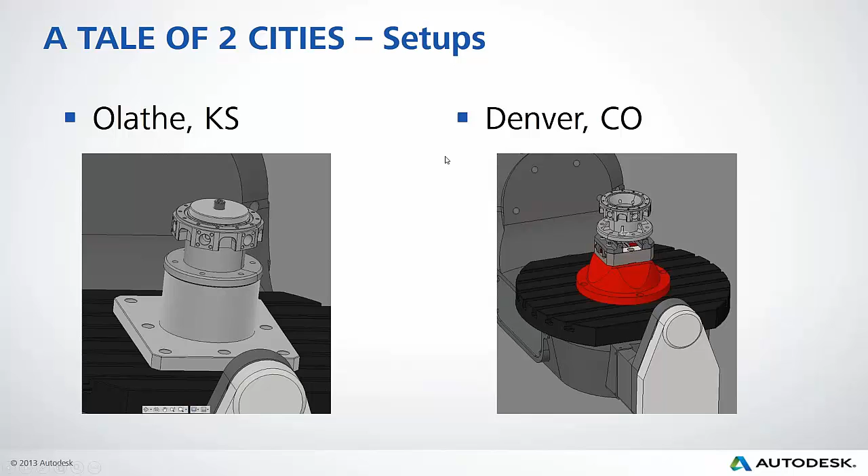So here were the setups that we had. Mike actually created this workholding. He created the base and everything, pulled the connections for the flange here, and then also this little clamping piece on the top as well, which really worked really well. And then in Denver, we ran it on a 5th axis vise.

To begin with, whenever we started looking at programming, we had this little list of tools, and this was a list that Mike had. So we came up with our tool list, built it all in Fusion, and then I sent it to the Denver guys so they could get their tooling as well. We were literally running similar tooling, even though we're running steel in Kansas and aluminum in Denver. So they had more 3-flute, and we actually used some 5-flute tools.

So this was a stock part, or stock piece, that we started working with. Prior to the demo days, Mike had actually gone through and done the opposite side of the part, where we were clamping it down to the workholding so we could machine out the rest of it.

So with that, here's what I put down covering today. I want to cover parameters and text inputs to control values, more or less my height planes, and then my actual depth of cut. We're going to look at 4th axis wrapping and different ways that we can use it. Patterning, 5-axis wrapping, and then one that's kind of important that goes with the 4th axis wrapping is using STL files for rest machining.

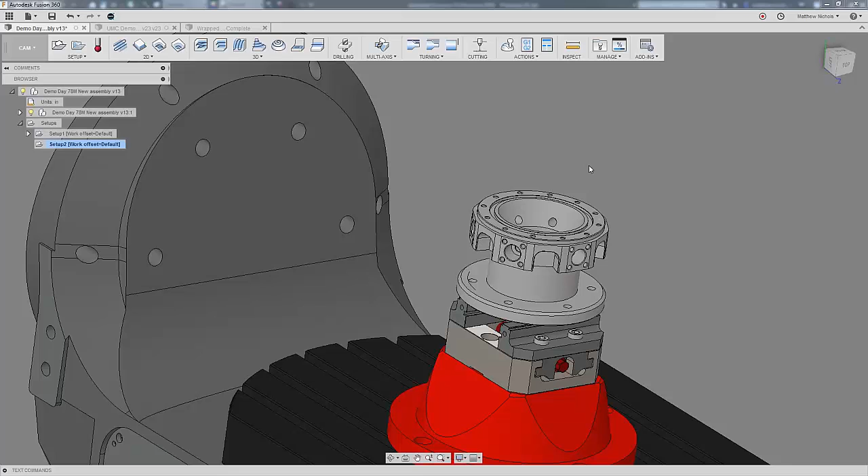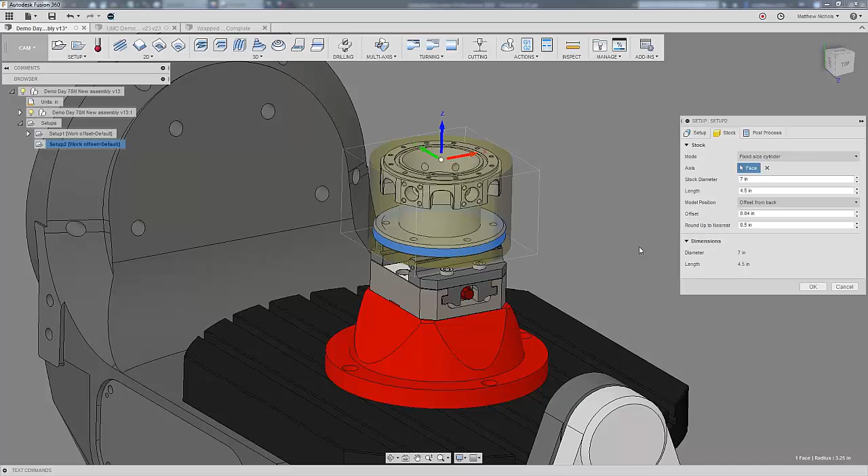So with that, let's go ahead and dive into Fusion. Here's the setup we're going to look at. So as you can see, I've got Setup 2. I come in here to my setup. I'm working with 7-inch diameter stock at 4.5 length, and that's also including the dovetail at the bottom.

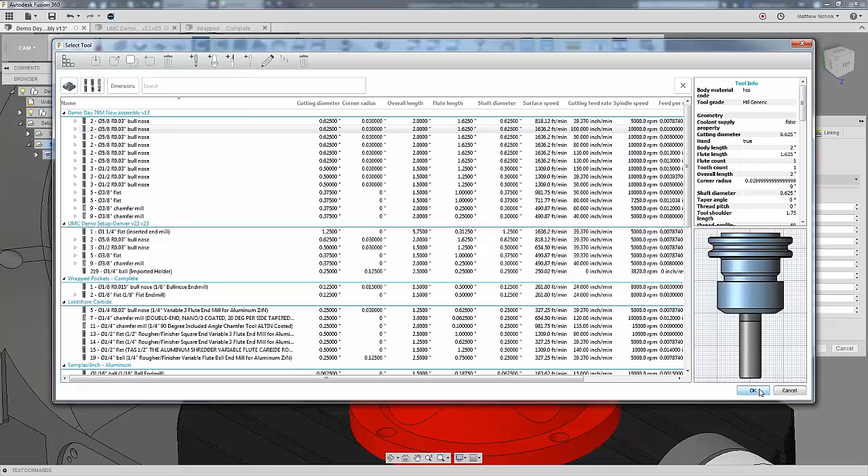So to go in and start programming this, the first toolpath I did, I wanted to get here out around the top here, just to begin this first toolpath. I grabbed my 5/8 bullnose end mill, I've got 1 inch and 5/8 flute length on here. So on this one, what I want to do is run it at 130 inches a minute. I'm going to do my lead-ins a little more than that.

For geometry, what I want to do is leave it with no selection of my geometry, and then I'm not even going to have rest machining on. I'm just going to leave stock contours. Now, for my heights, I want to make sure my bottom height is, basically, I want to control it by my flute length, okay?

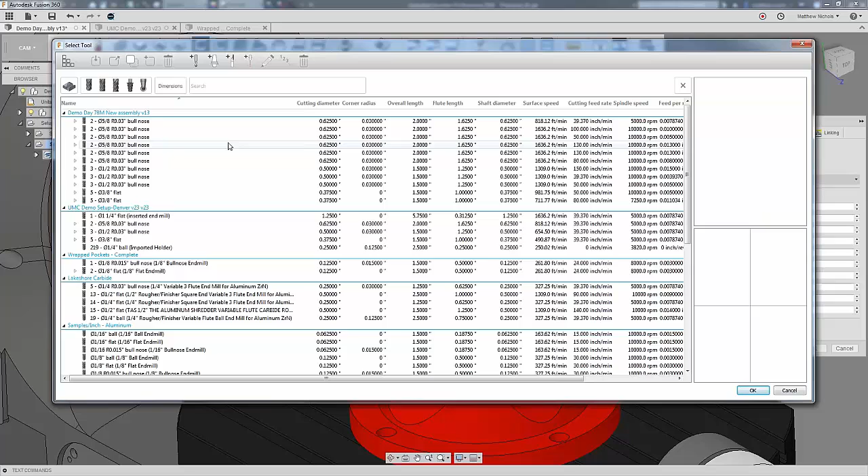I don't know how many people out here know this, so this is one of the tricks I wanted to show. I actually have to go into Inventor here for a second. Typically what you can do in here, in these text values, is hold down Shift and it'll show me parameter names. In Fusion, it doesn't actually work in the tool library. So if I come over here, in the flyout at the bottom, you can see the parameter name of that value. The cool thing is, and I know not everybody is using Inventor, so what I may end up doing after this is posting a small list of the tool parameters on my blog, so everybody can go look at it.

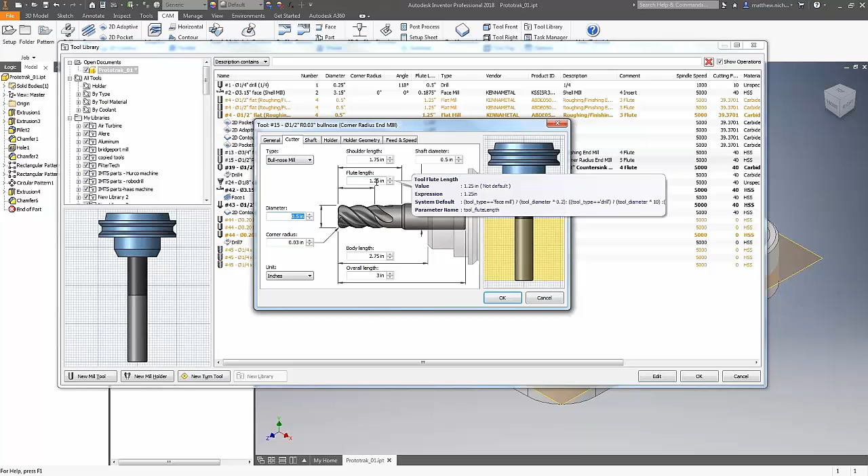But anyway, so what I want to do is control by my flute length. If I go back into my toolpath, in my heights tab, I'm going to come in here and say from model top, and then put negative tool underscore flute length. Now, I know I've got a little bit of extra space between where my flute and my actual collet is for the holder.

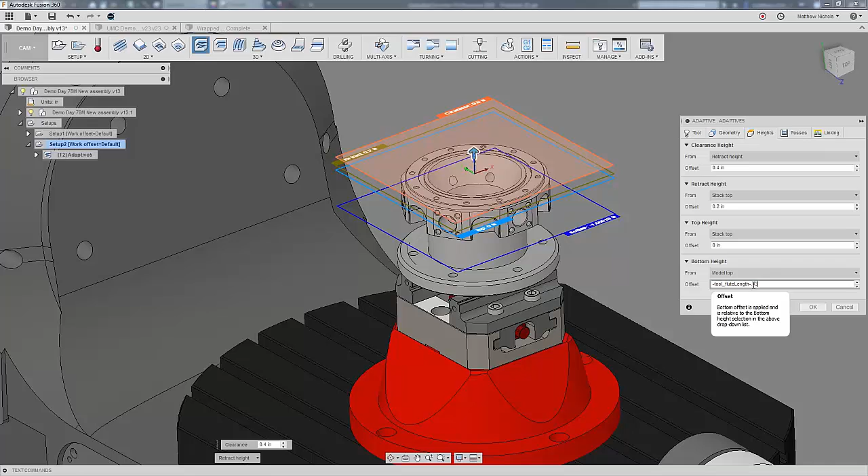So whenever I do this, since I've got that bull nose, that's not going to give me a flat edge right at that line that I'm wanting. So then what I'd also want to do is add basically my corner radius as well. In this case, I know it's 30 thousandths, so I'm just going to add 30 thousandths to that as well, negative. Okay, so I'm going to let that calculate.

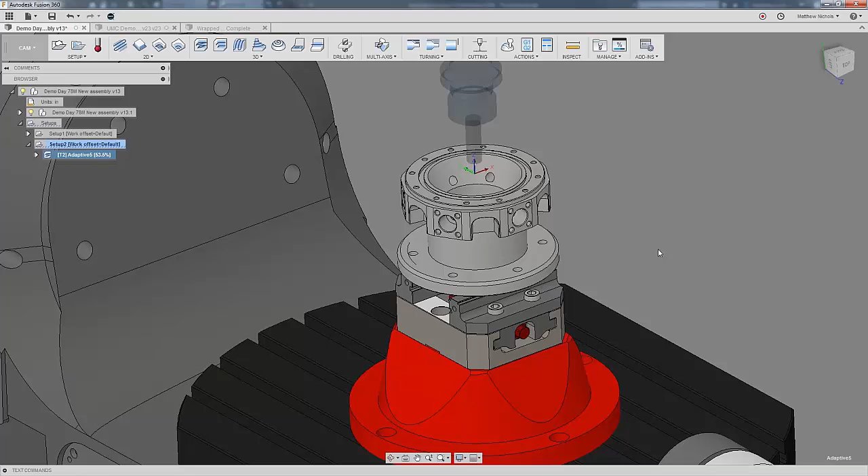Oh, actually I don't want to do that yet. So you can see it was actually going on the inside. Basically on this operation, I just wanted to cover the outside. So if I go into my passes and hit machine cavities and turn it off, I can hit OK, and now I'm going to get the outcome that I want. So that gives me a roughing of the outside. I've got 20 thou still left on perimeter here on these faces, which we'll come back and get later on.

All right, so that's the first step. Now, the next one is the fun one. So now we're going to look at the actual fourth axis wrapping.

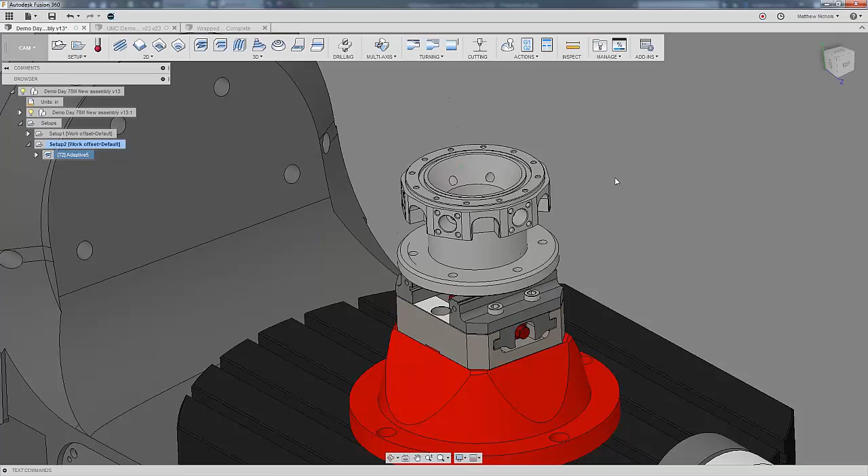So a couple of things I want to show is whenever I come in to do a fourth axis wrap, there's different ways that you do them. A lot of the examples you'll see are parts like this where it's got a pocket that has a beginning and end that you can see. It automatically selects it all easily. But what we don't look at a lot is how do we work with a profile, or a pocket that doesn't technically have a beginning and end. Here's a couple ways that we can do this.

One way is I'll actually create this, and I'll show you so you can see that I'm not just crazy, which is possible still. Anyways, I'll pick my face, or my diameter that I want to wrap the tool around. Now if I go in and actually pick the pocket here, you can see that it just picks that edge, and now I have a red perimeter around it. If I hit OK, I get this warning: cannot unwrap cyclic geometry.

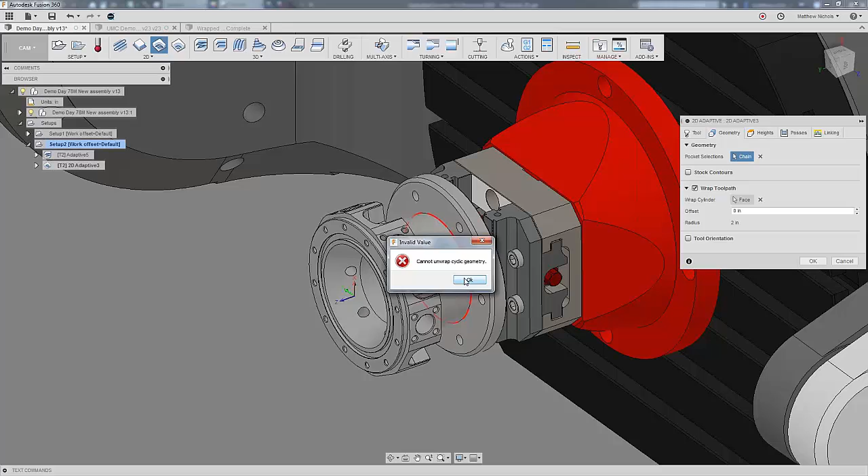Okay, so here's how I go about doing this. I'm going to hop over to my model side real quick. What I want to do is create a plane that's tangent to my cylinder. I'm going to grab this face, and then I need to pick a reference plane as well. I'm going to come in here to my origin. Grab this plane. So now I've got that plane built, and I'm going to create a sketch on it.

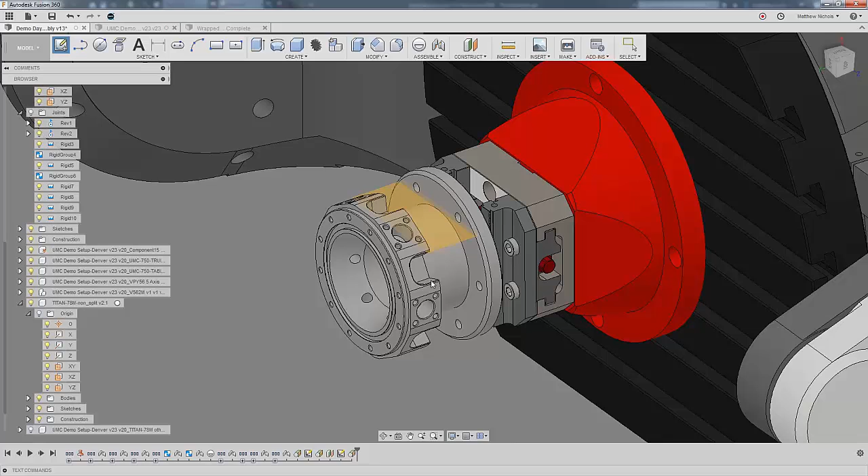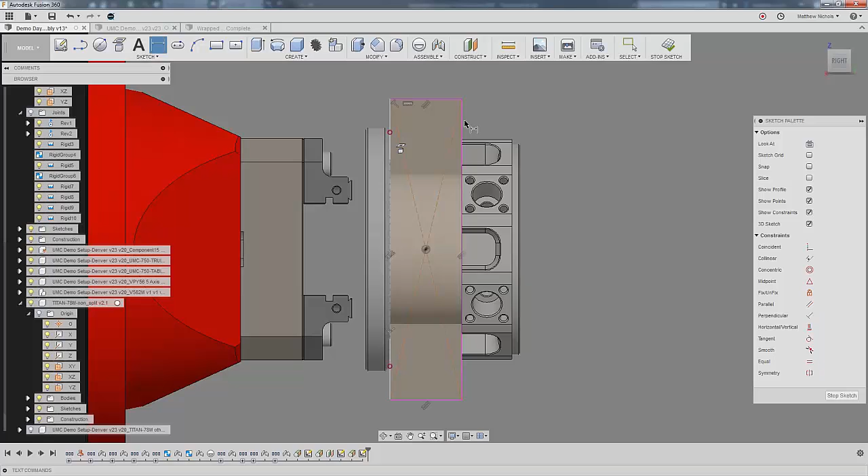I'm just going to do a center rectangle, then project that edge. And then I want to do a linear constraint just so it stays on that. Now the cool thing about doing this is since that center point is right in the center of that pocket, when I do that linear constraint, it automatically snaps the proper width for that pocket. So then all that's left is to actually fill out the length of it.

So I know I've got a 4-inch diameter cylinder where that is. So I'm just going to do some basic math of 3.14 times 4. That gives me 12.56. Now, you're bringing us back to math class. Why did you put 3.14? Pi times diameter, it's pi, you have 3.14. So he's calculating out the circumference of the circle.

The other thing I wanted to bring up here for anybody that's not doing it already, all of our CAM products run inside of parametric tools. So again, if you're HSMWorks or Inventor HSM, same kind of thing. Matt is intuitively capturing his design intent while he's working. It's always something you want to do when you're using a parametric tool, so that when changes happen, the tool path and everything updates the way you want it to. So I'm noticing you do that intuitively, and that's the habit we all want to be in as we're modeling and programming. Yep.

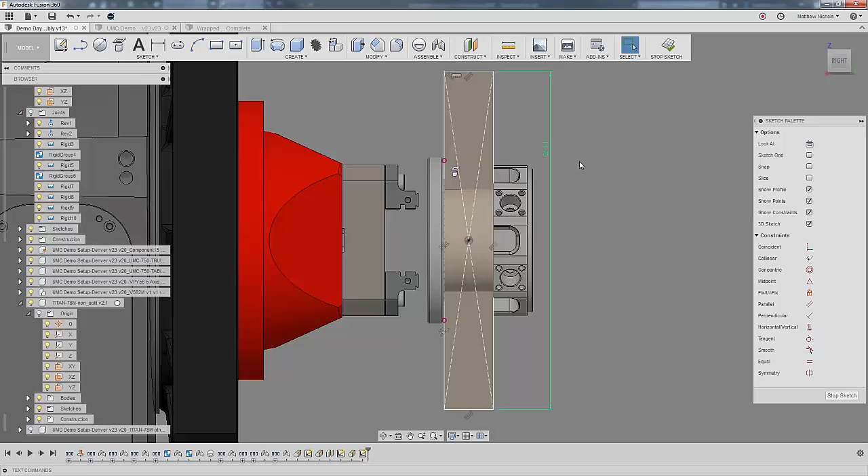Yeah, absolutely. So this gives me the 12.56. Now I'm going to add just a little more to it, and I'm actually going to take out all this. So that 12.56 gives me just a reference number, but I want to make it larger just so I make sure I have overlap so that I get all the material clear that I need. So I'm just going to bump it up to 13.25.

So now with that, I can come back over to my CAM side, and then again do my 2D adaptive. Come over to my, let me make sure I have the right tool. Yeah, okay. Come over to my geometry tab, pick my wrap tool path, pick the cylinder.

Now for the pocket, I can just come in and I knew it was going to do that to me. And another thing I forgot. So one thing, I haven't figured out why it was doing that to me. Whenever it does that sketch, it wants to actually select this geometry that should be construction, so it shouldn't actually do it. But since it is, I'm going to go ahead and delete it.

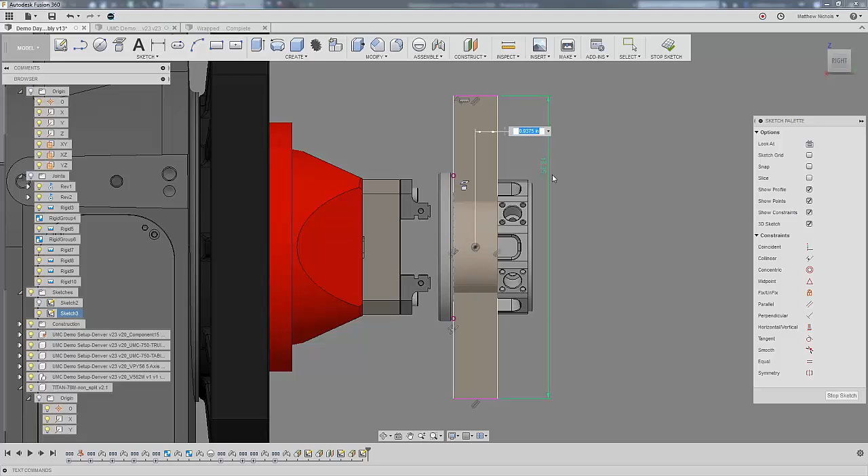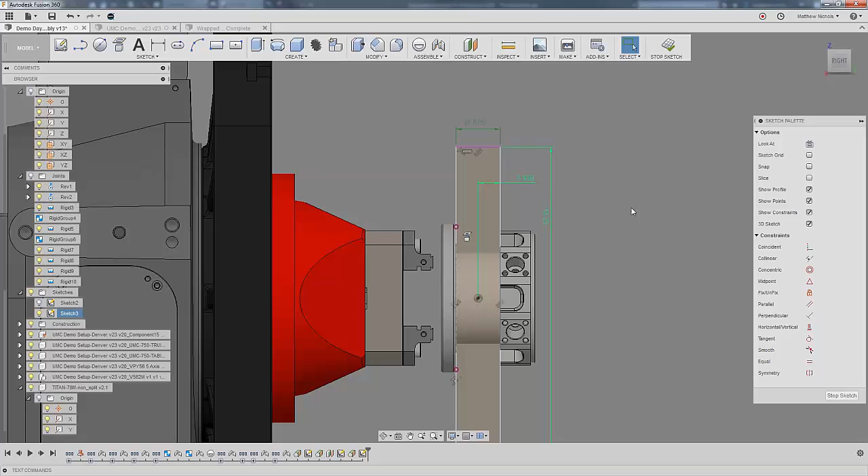So another thing you can do with dimensions, since I lost that whole center point rectangle part, I don't want that to be driven dimension. There we go. Okay, I'm gonna hit that, hit this, yes. So now this gives me a driving dimension here. I can go back in and modify this dimension, pick that, divided by 2, so it'll always reference that dimension and divide it by 2 every time. So I still get my parametric side of it. It's just not the way I wanted it to.

Anyways, back to the CAM side. Again, do the adaptive geometry wrapped. Now I grab this pocket. Then what I want to do is tell it multiple depths, because I only want to take about a half inch step all the way around as it goes down. But I'm still taking a half inch step over, so I'm still removing quite a bit of material in one shot.

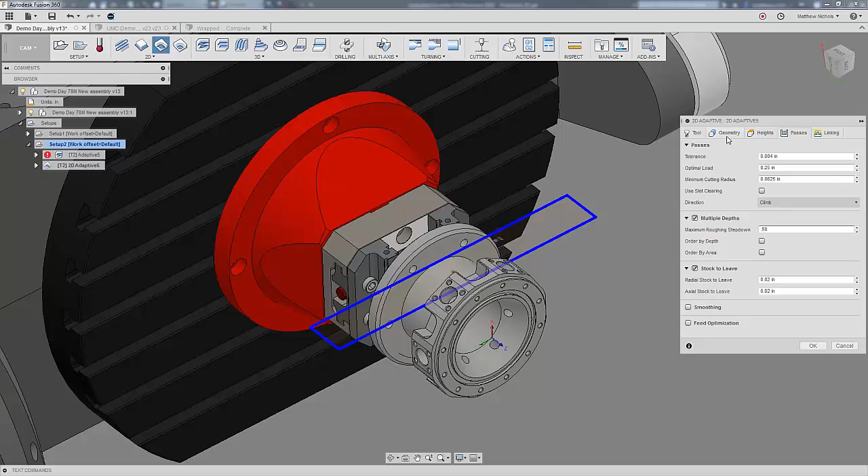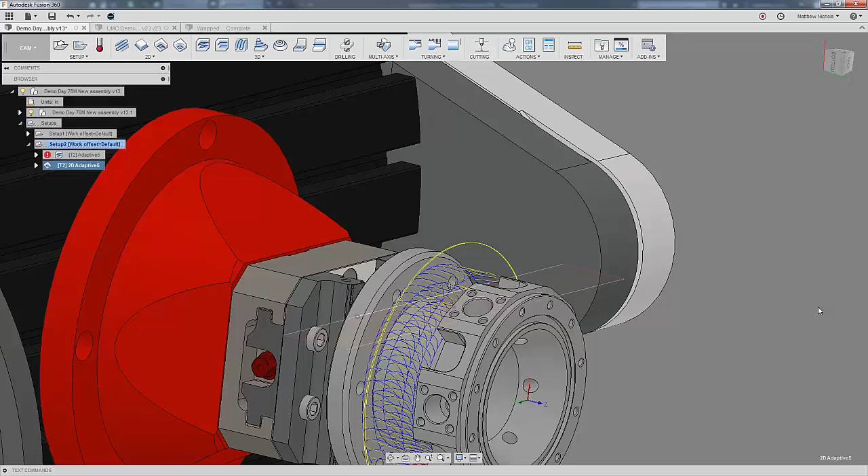And then my heights tab, what I want to pay attention to here is I want to make sure the top is still at my stock top, because I still have the material on this edge up to here. So I want to make sure I account for all that. And then I'm just going to hit OK. And then we get our awesome wrapped toolpath. You can see it overlaps just a little bit, enough to get all that material there.

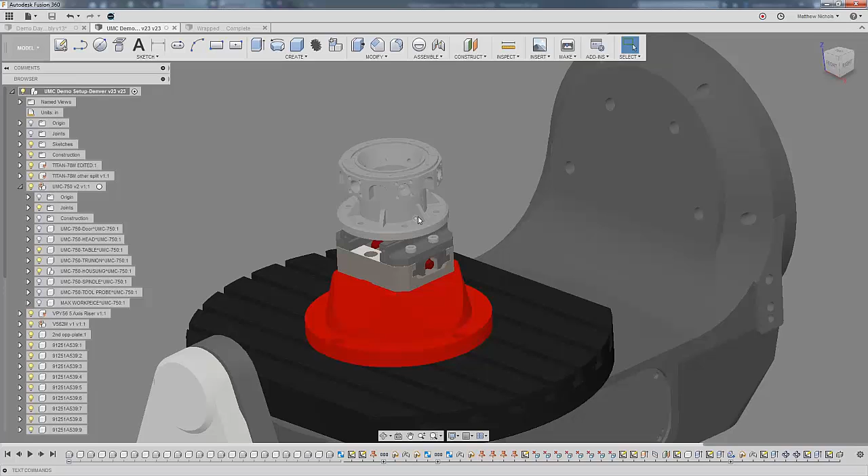Now here's the next question. Let's say we have an open pocket like this, but I have something more along the lines of this as my geometry for that pocket. So we use the same process, except I don't have to create a sketch on this one. This one's a little bit trickier, and I'll show you why.

So if you can see on this part, these little split lines were my workaround for being able to select these pockets individually, as well as having them overlapped so I can get complete pockets. Now the one thing is that even though I did this and could overlap the pockets, I can't select both sets of geometry at the same time. So I actually have to do 2 separate toolpaths, which is ironically what we did whenever we ran the part at demo days. We had 2 separate 4th axis wrapping toolpaths that drove it.

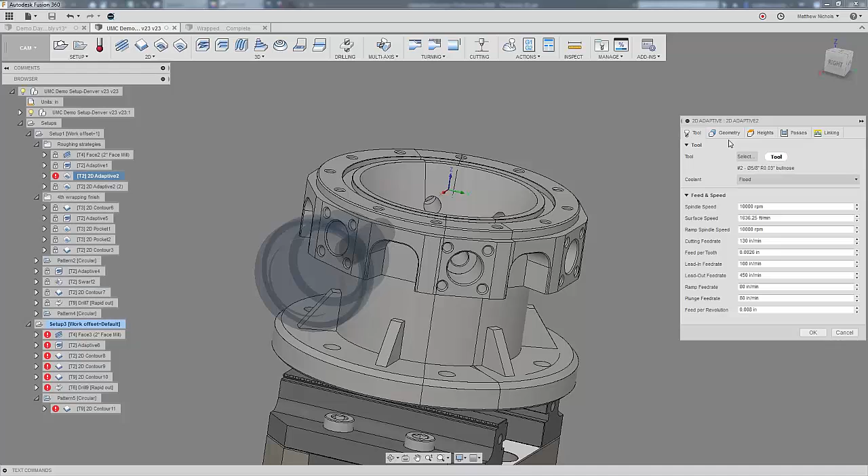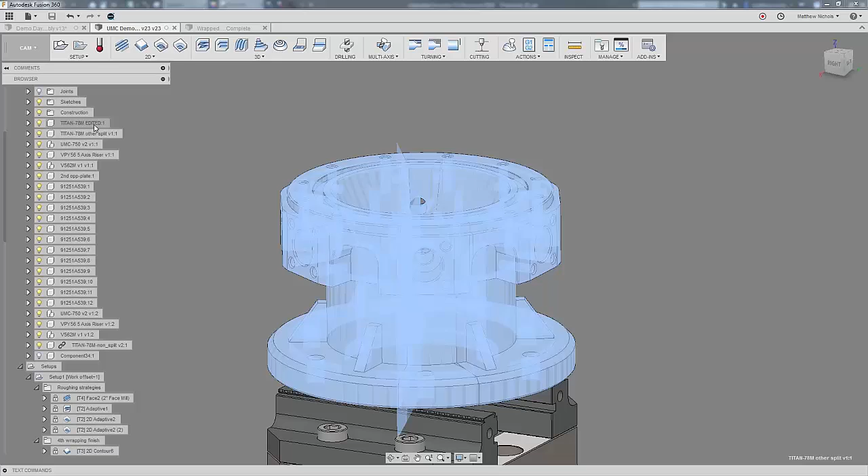So if I come over here, this is the kind of geometry or toolpath we had. If I come in and actually look at this, you can see that by splitting this part, I was able to select this contour that wrapped around to a certain point. What's hard to tell is there's actually 2 parts: this one, the split, or 'other split,' and this one that's edited. So they both are overlapping each other. I used one for one split and one for the other split, so that's how I got my overlap.

Yeah, that's good. As a product manager, it makes me sad that you have to do it that way, but at the end of the day, people need to make parts, and it's good to know you can use the modeling side of Fusion. It's correct to be able to use the modeling side and make the software do exactly what it is you want. You're hitting on some excellent points here, Matt.

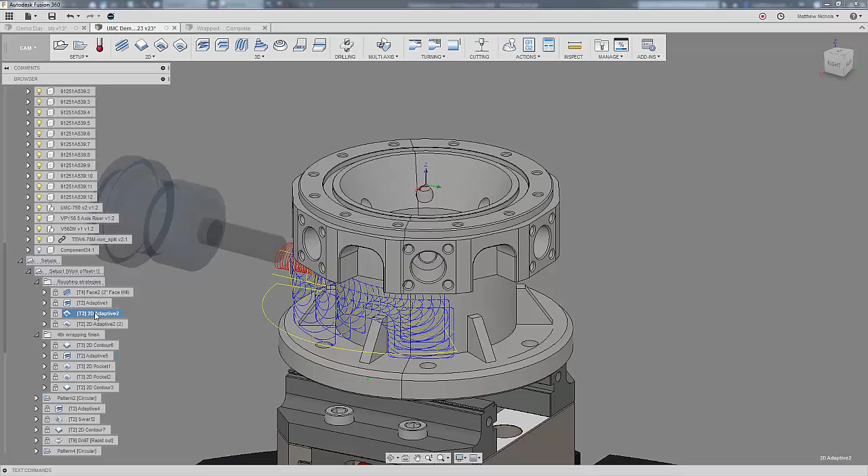Awesome. Yeah, so that's how we go about putting that wrap toolpath around where these ribs would be. It actually turned out really good for the size we were running, for the parts that had the ribs, and it was actually really fun watching it too. So that's how we create those, and that's the difference between seeing something like a pocket that has a beginning and end, versus a cylindrical face, and how you would go about controlling that.

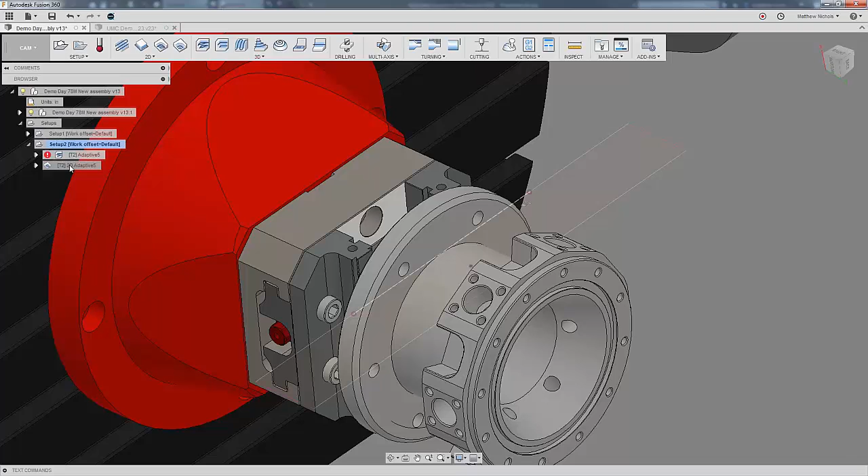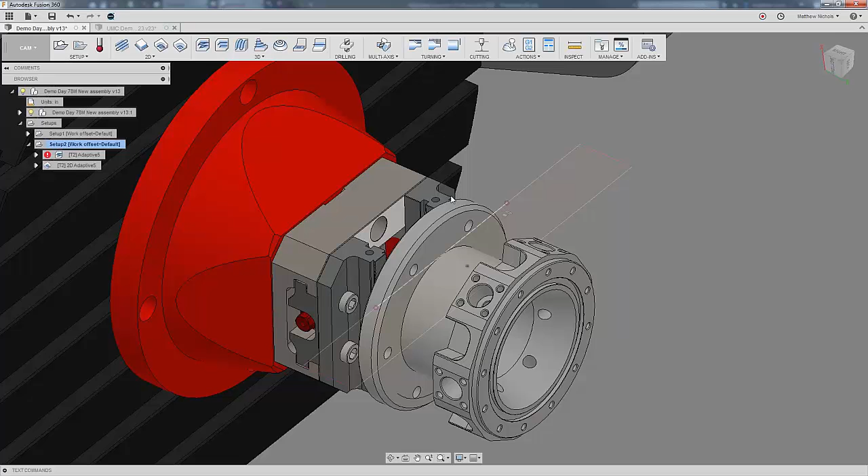So we got this one. Now what I want to do, and this one was kind of fun, is I remove all this material here, and I want to go finish this pocket, but I still have that extra material on the top here. So I want to do a real quick operation just to be able to go in and finish that contour. If I go back in here, I got a sketch in here.

So another sketch I created to do a 2D contour wrap, which you could do a pocket on just like this as well, but I decided to do a 2D contour on this one. So I'm going to do the wrap toolpath again, pick my face of that inner diameter, and then go over here and pick my contour.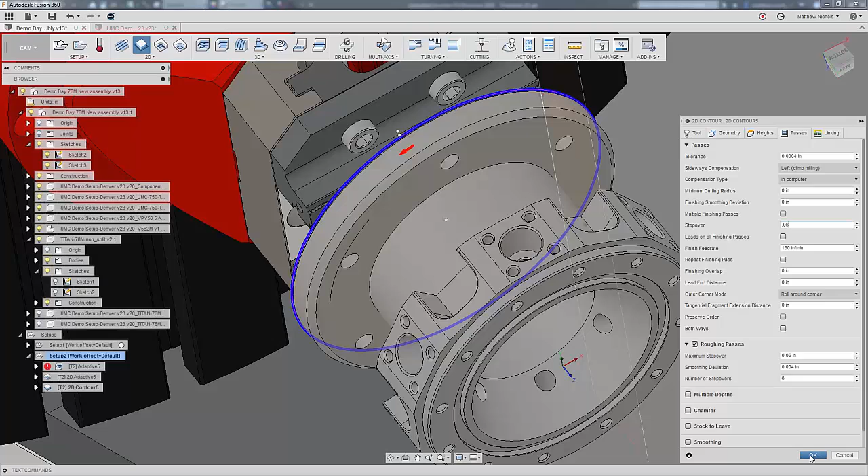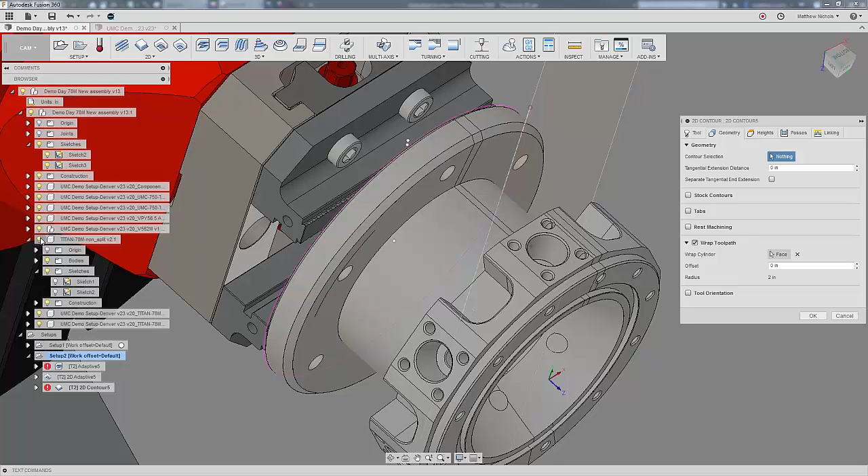All right, now this is where my other models come into play. Pop those on, pop that on. So here again, I have to pick the 2 split lines, and I have both those models in here as well, so that's going to be part of some of the other stuff I'm going to do. I have those split lines, so I have to pick both those contour splits to just get the full wraparound, but once I do that, it works really well.

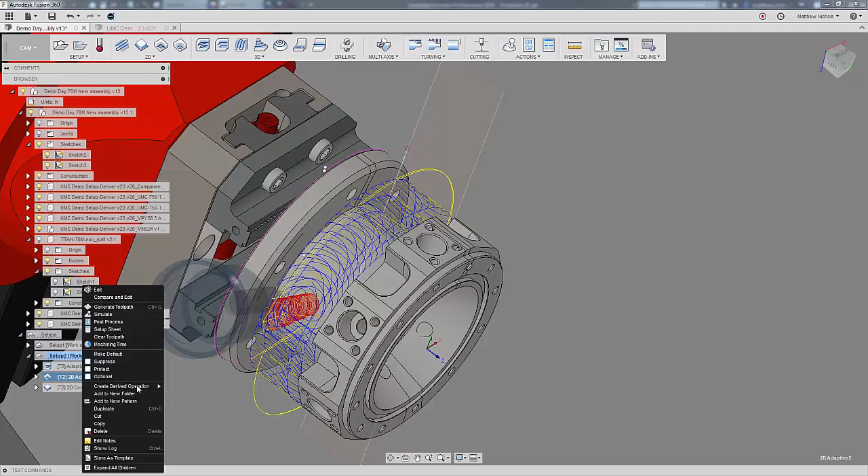So then I get a full wraparound. Alright, so now since I've got those 2, I'm okay to go in and finish that pocket. So here I'm just going to do a derived operation, a 2D pocket. The cool thing with that is the geometry, everything I wanted, is already selected for me. The only thing I need to do is come in and turn off stock to leave and multiple depths.

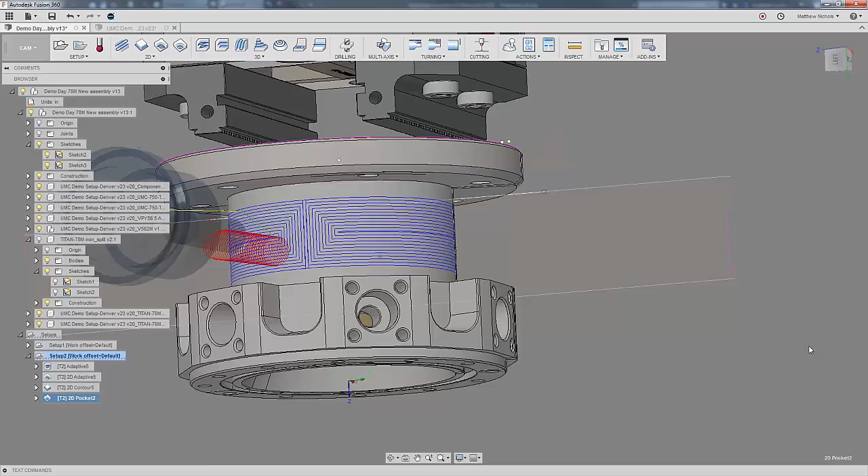So let's do, since we got that, let's do a simulation real quick. Okay, and then ceramic, alright. So I'm going to go ahead and do simulate. Speed it up some.

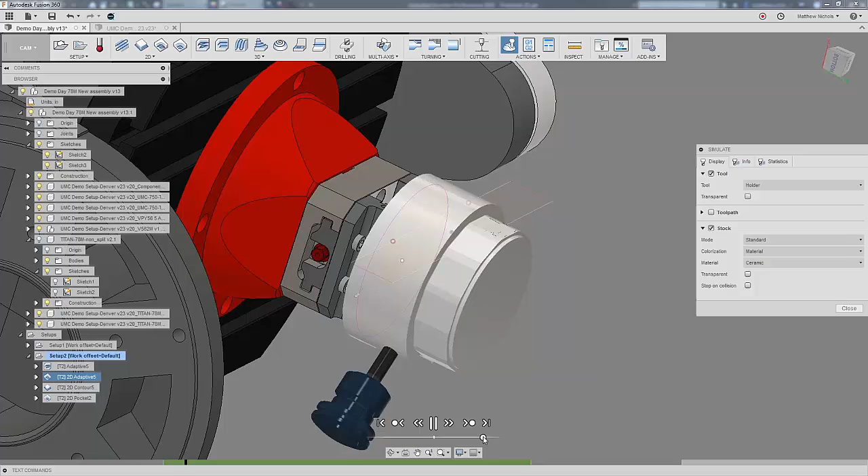So the fun part about this, right now my run time is at 16 minutes, and that's actually pretty close to what it was for just these operations.

Okay, and then once this is done, it should be in a second. All right, so now at this point I'm actually going to right click, and I'm going to save this stock, and we're going to use this here in a few minutes in an operation. You'll see what we're doing with it whenever we come there.

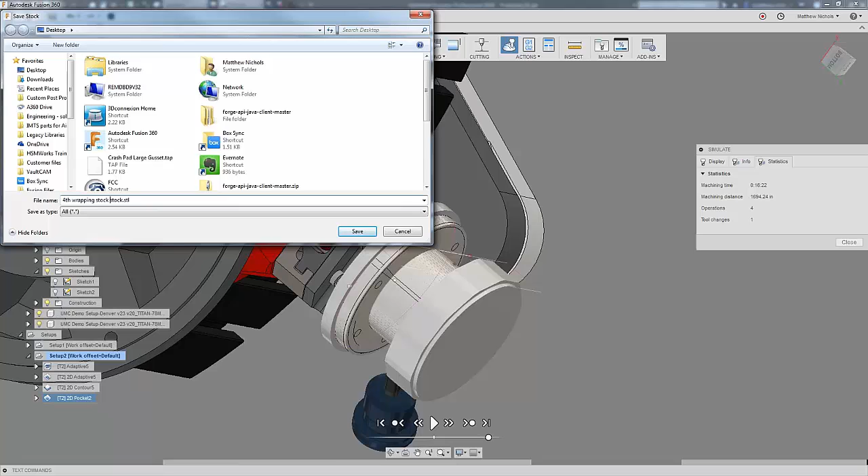Ben's asking if eventually we're wanting to handle cyclical wraps or wrap cycle all the way around in another way. The answer to that is yes, Ben. When we were first working on doing wrap geometry, we had a discussion with the kernel team trying to decide how we should prioritize the work. They do have a thought, an idea for how we could write a kernel that understands these sort of cyclical things and makes intelligent decisions, but we chose to get product out and understand that there would be a shortcoming in these situations. We're not working on it yet, but we have a solution for how we want to solve it. It's just a matter of prioritizing that work with the other work.

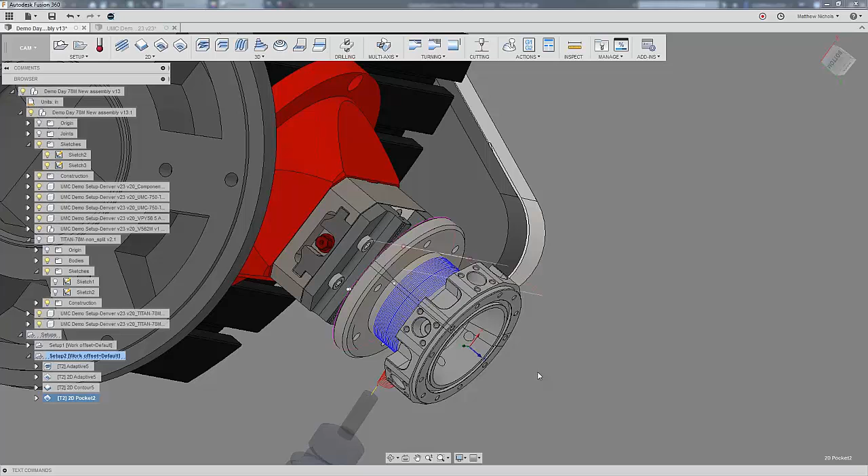So the next place I wanted to go in this is addressing basically these different pockets or the drilling locations. So the first thing I want to do is go ahead and actually work on this pocket. And actually, real quick, one thing I need to do is a 2D contour, and turn off these two. That's that one, alright.

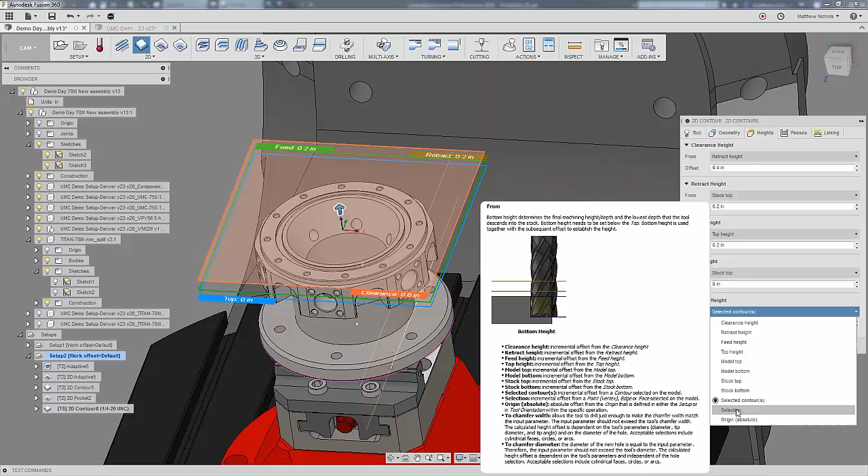So here I want to go selection... I got a quarter inch 20 on that. Whatever. Alright, so I wanted to go ahead and do a finish toolpath around that face.

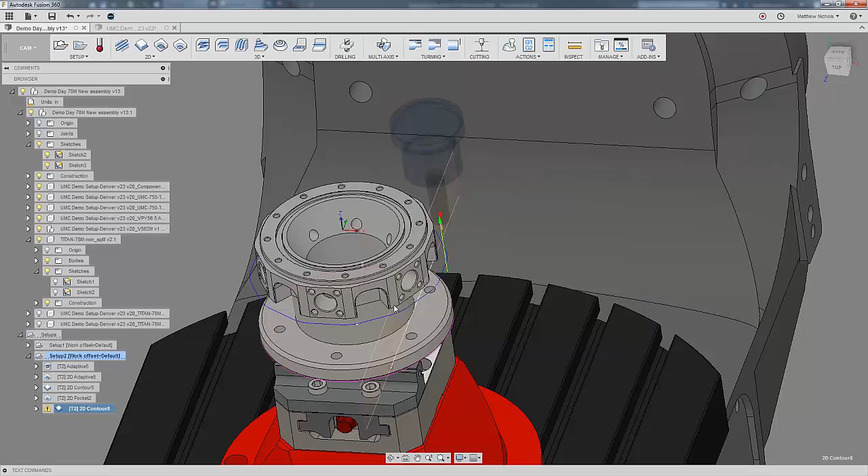Okay, so with that, now I'm going to go ahead and start working on these pockets. So here's one thing to keep in mind. Okay, so I'm doing adaptive. I'm going to actually drop down to a half-inch tool. So I'm going to go to my geometry tab, I'm going to do tool orientation, and I'm just going to grab the bottom of this pocket for my Z.

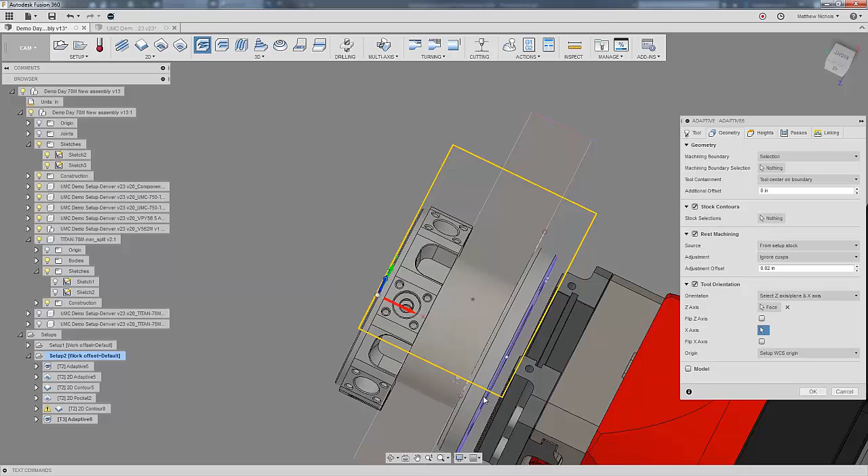Turn stock contours off. Now what I want to do here is set my selection for my machining boundary because I only want to do this pocket, right? And I do want the tool to go center. Actually, I'm just going to go ahead and say outside, because what I'd like it to do is start outside and work its way in.

So now if I hit rest machining, I'm going to go from previous operations. Here's one of the things to keep in mind, and this is one reason why we did the stock STL. So if I come in here and let it calculate this toolpath, notice I'm getting the helix in, and then it's adapting and getting all the rest of this. Plus now I've got this warning.

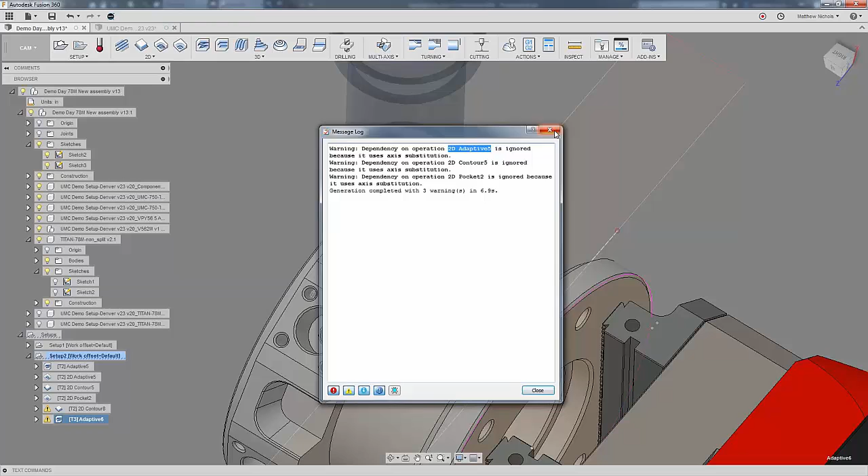Here's one other thing that with the fourth axis wrapping I had to kind of finagle. It ignores the material that's been removed from those operations. So here's where that STL comes into play. This is one of the things that's great in Fusion.

So instead of rest machining from previous operations, I do from file. Now from file, if I come over to my Windows Explorer, desktop, properties - in here what we have to do is put the location of the file. So it's kind of cool - grab that, grab the name, hit OK here. Now here's the cool part.

It almost did what I wanted it to. Hang on a second. Now it did what I wanted it to. So I give it a little offset out, and then it starts on the outside and works its way in. Now you can see I don't have a warning about rest machining because I'm using that file, so it's just reading from the STL file directly.

Now if I'm looking ahead at what I'm actually programming later, you can see that I've got these little staircases, and they're kind of big. So whenever I come in with my swarfing operation, I'm going to have those staircases to deal with. If I wanted to minimize that a little bit more, one way is to go to the Passes tab - you have your maximum roughing step down, then your fine step down, which if I look at the expression on it...

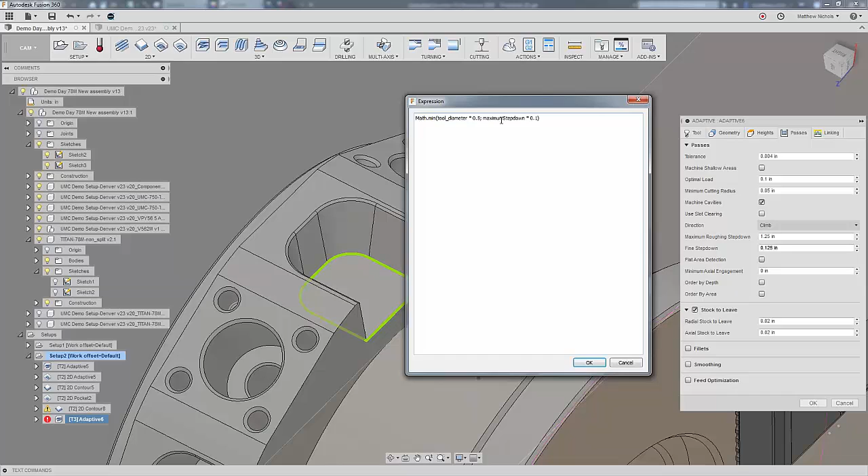...is basically derived from my maximum step down distance. So on this, if I just wanted to give it a generic number, I'm going to do like a 60 thou step. So now I get more stairs up. I'm going to have a little bit less material to deal with whenever I come in and swarf.

I like this trick. As Matt got chunks of work done, it's a good way of mentally putting that in a folder and saying, I'm done with this. It's ready, and you have a nice clean way of checking that part off.

We often talk about how you go about machining a part - as machinists, you look at the part and attack a small piece of it, then attack the next piece, the same kind of thing. How do you eat an elephant? One bite at a time. Most complex parts to machine are simply about attacking one part of it at a time, and folders are a nice way of organizing your mental model for how you attack the part.

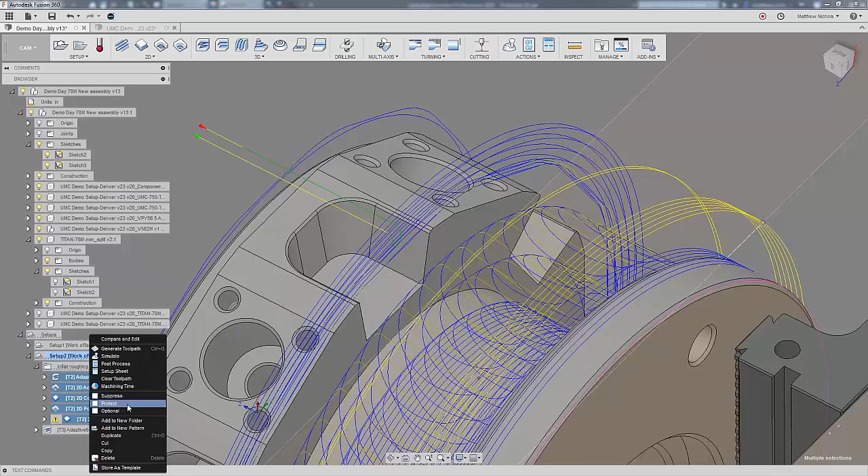So nice to see you do this, Matt. Cool. Yeah, and so the last thing I'm going to do is protect them so that I don't lose the actual toolpath.

So if I went and changed geometry, it would make it dirty again, so I don't have to regenerate it again. I'm just going to protect it real quick. I'm going to collapse some of this so I can clean it up.

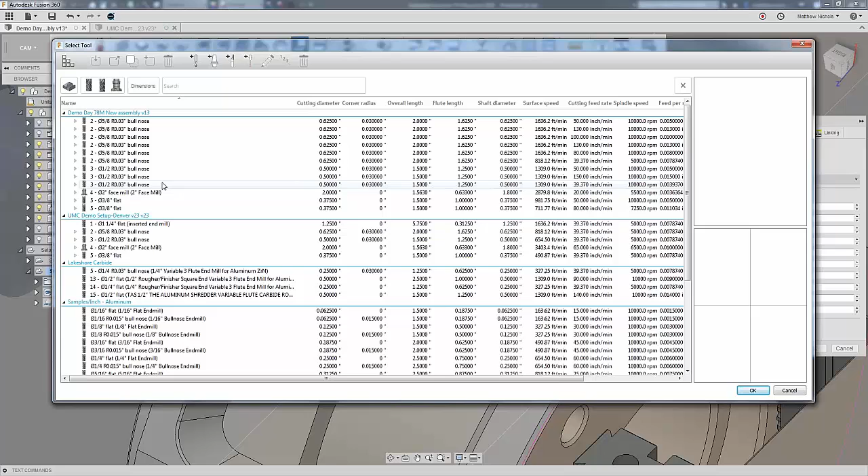All right, so we did the adaptive. The next thing I want to do is come in and put a finish on this pocket with a horizontal operation. So again, I'm just going to hit the horizontal operation. I'm going to grab my 3/8 flat. I'm going to go to my geometry tab. For my tool orientation again, grab the bottom of the pocket.

Now, the next one is I want to make sure I limit my height so that I get exactly where I'm wanting it to go.

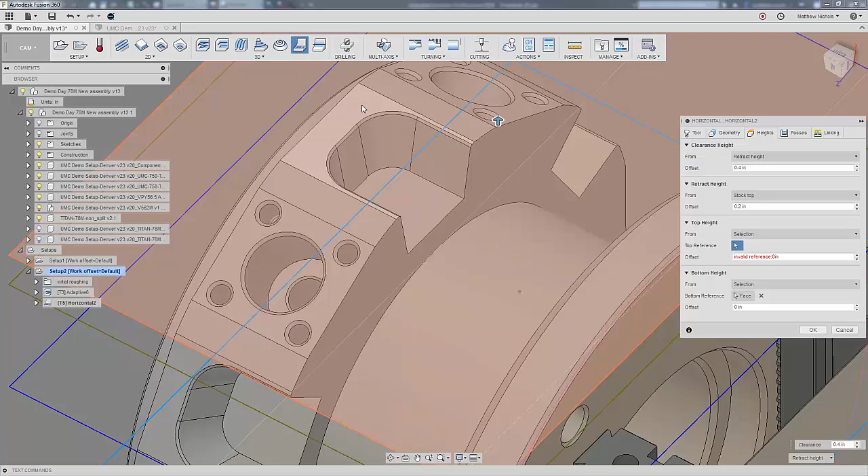So I'm going to grab the bottom of the pocket for my bottom height, and for my top height, I'm going to select the top face here and go negative 10 thou basically. That limits it to only picking that face.

So now that I have a finished surface on here, I'm going to go in and do a 5-axis swarf real quick.

Let's come in, I'm going to grab the 3/8 again.

Alright, so a couple different ways I can do it. I don't know why it's doing this on me. You have your different driving modes - you have contours and you have your surfaces.

So one way I was doing this is doing contours and doing manual selections, because I don't know if it's the model and how it was done, but it just did not like how I was selecting things, especially if I went to surfaces and then to faces. I get this crazy thing. So something in the model is just making it kind of screwballed.

So I go to my contours, and I go to manual, and then I would just come in and individually pick these lines. One quick note on this - and I found this out almost the hard way - whenever you're picking the contours, always pick the bottom line first and then the top.

Your first selection drives the bottom of the tool, and then your second selection drives the top of the tool. Your bottom is always blue, top is always orange, or yellow, whatever it is.

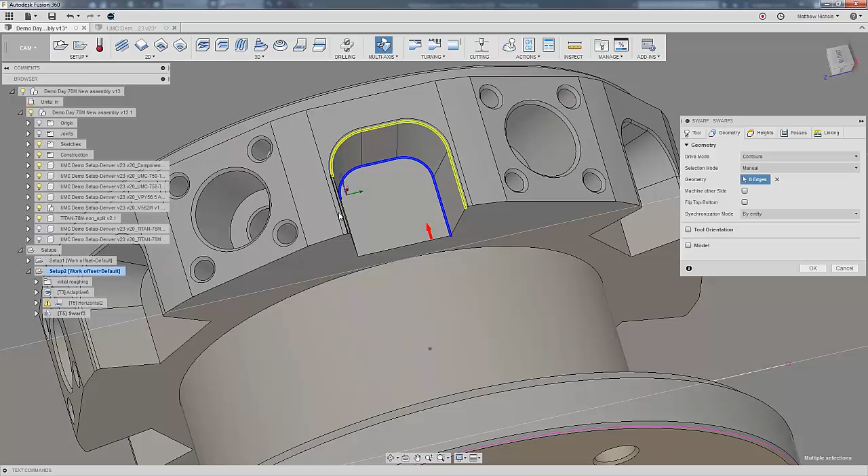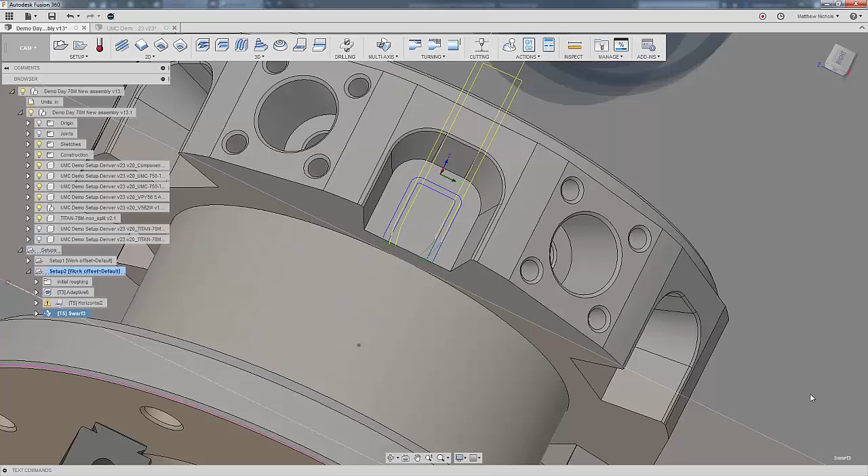Okay, so now once I do that, I always keep my synchronization mode to constant slope - that's just personal preference. And then I also did multiple passes. I did 2 passes at 60 thou step, just because I wanted to make sure I had a decent finish on it. And so that's what I would get.

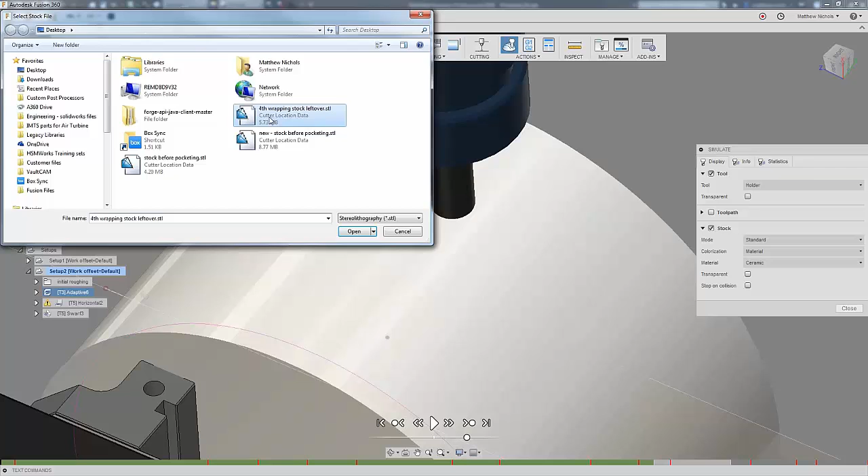So now if I go back, I'm just going to grab these 3 real quick and come in and do simulate. Now you can see I don't have all the other stuff simulated, but if I right click, go to stock and load stock, grab that 4th axis wrapping.

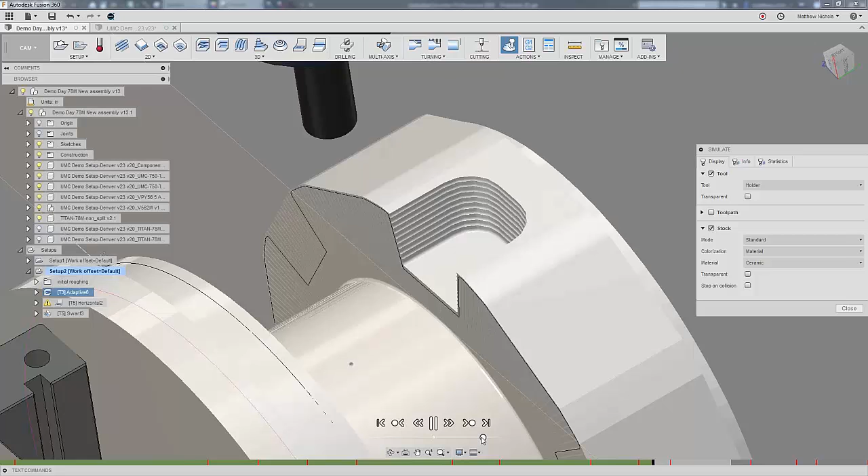And then let it simulate on that. So now real quick, I can take these operations because I have them already, I have the pocket set up. The last thing to do would actually be doing the chamfered edge.

Let's come in here and grab this 3/8 chamfer real quick. Grab this contour. Another little trick - whenever you hover over this, you can see that it grabs basically a closed contour of its own. Hold down the Alt key and select individual lines.

We're going to do tool orientation first. I think you just did tool orientation maybe for the first time on this one. So for those of you that don't know, tool orientation is a way to do positional fourth axis.

Well, I did it on the adaptive and the horizontal. That's right, my mistake, I just forgot to on that one. That's why I wasn't doing what you wanted.

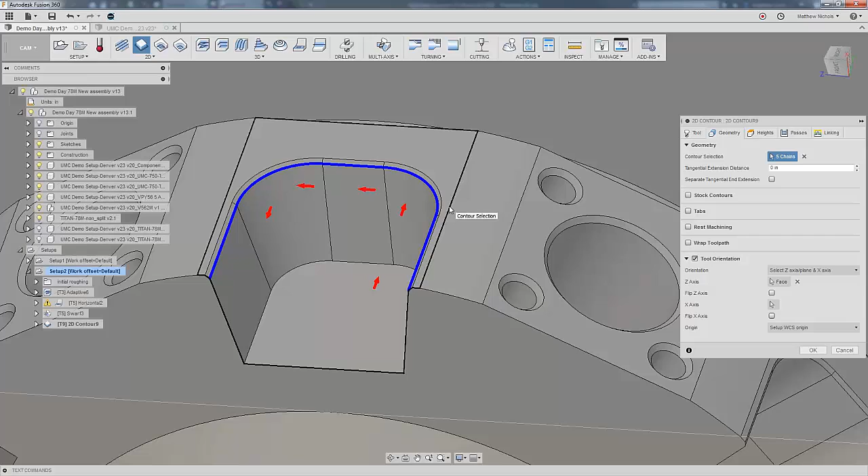But anyway, so Alt key, and I can individually select them or double click on the line. It'll give you the option to do open or close loop. I rather hold down the Alt key and pick them. Anyway, so I do that. Go to passes - I'm just going to do a little offset down.

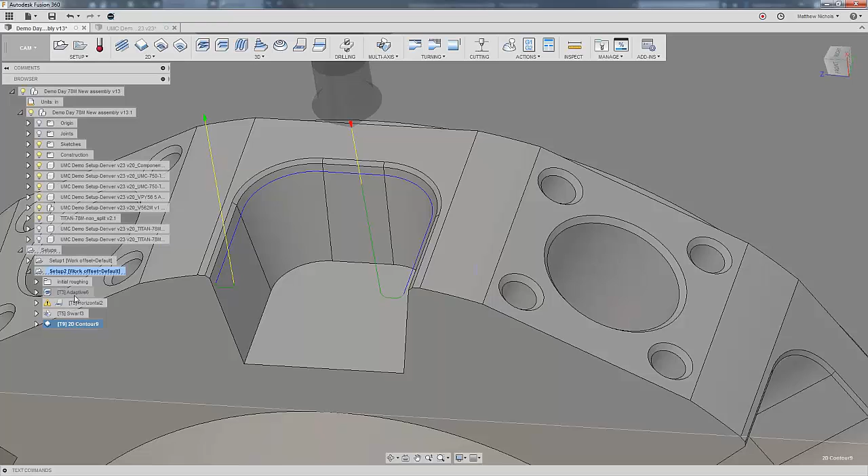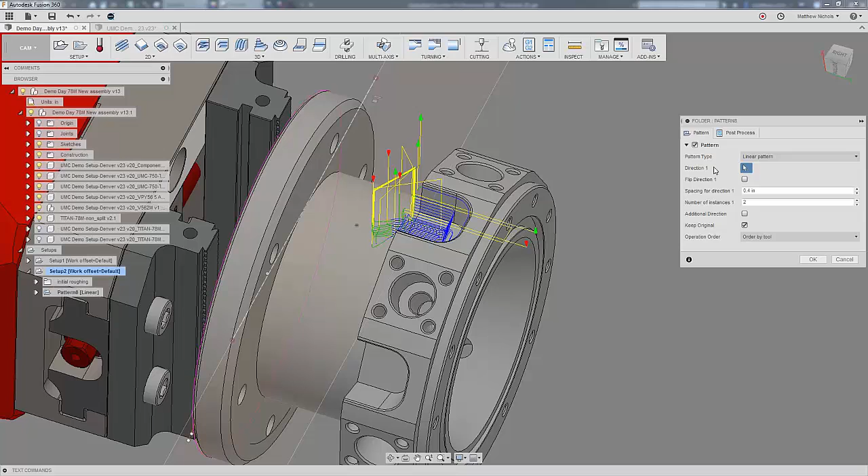So if I take those, I highlight them all, right click and say add a new pattern. Come in here and select circular pattern. Grab the axis - you can see it starts generating. So now what I want to do is put 6 in there. So now I've got 6 pockets.

And then I do want to order by tool. So in here I have preserve order, order by operation, order by tool. So I'm just going to do order by tool, so that I reduce my tool changes, and I'm going to click OK.

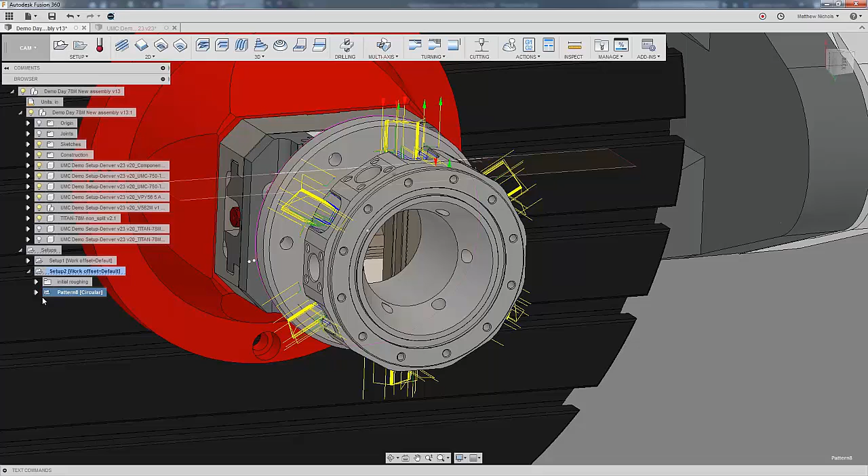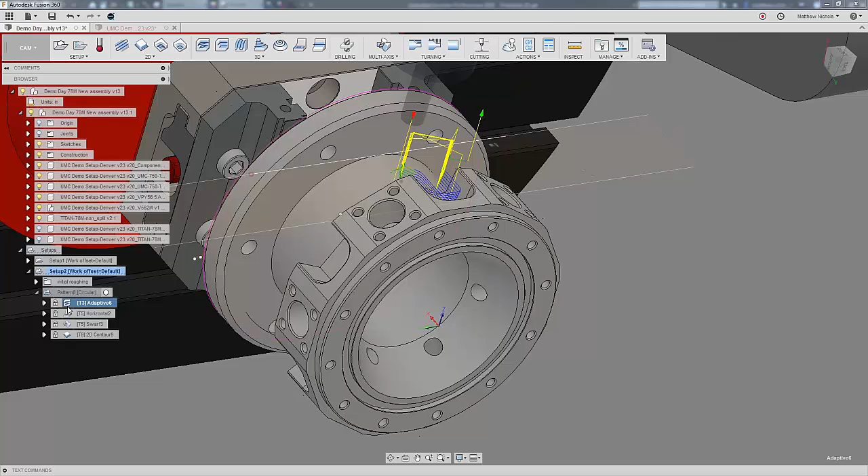And there we go. So the same thing to be done, once I do the drilling, tapping, and the circular cutout in here. I can either do it within the same pattern because I can activate what folder is active. So if I do any toolpath now, it's going to automatically populate to this pattern.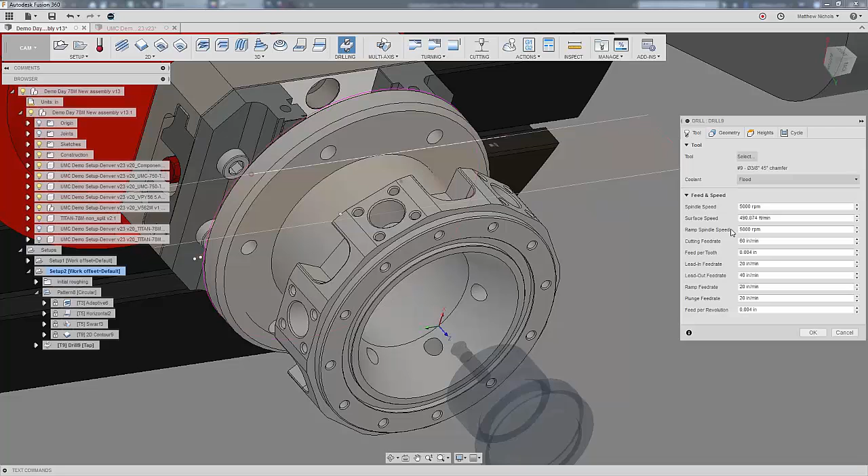If I left this active, it would create it outside of it. So if I do a drilling operation, let's go ahead and grab our 3/8 drill. Geometry, again, tool orientation, pick top face. Then here what I can do is I can just go in and grab that bottom diameter.

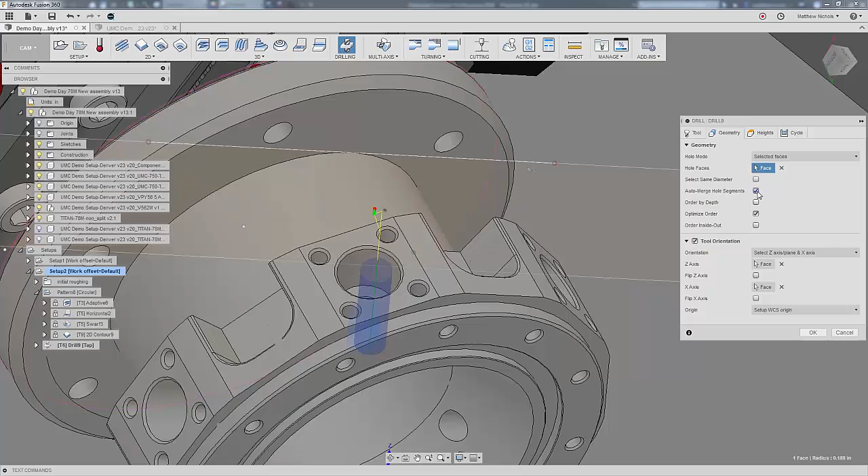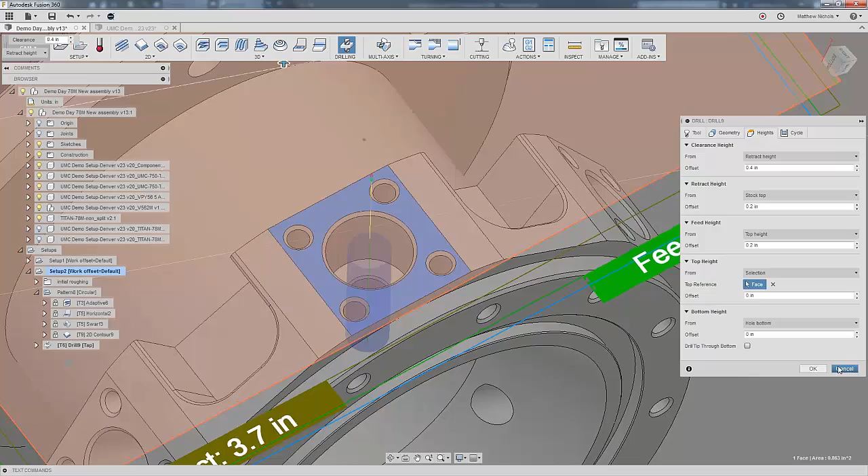Now, it's going to basically start the drilling right at that contour, but I want it to actually start up here, so I'm just going to select that top face as my hole top. And then this is drilled through, so if you notice down here in the bottom height, drill tip through bottom. And then I'm just going to throw in 1/8 inch.

I'm curious, how does everybody like the new preview of the drilled holes? Like it. Matt, we may have lost audio.

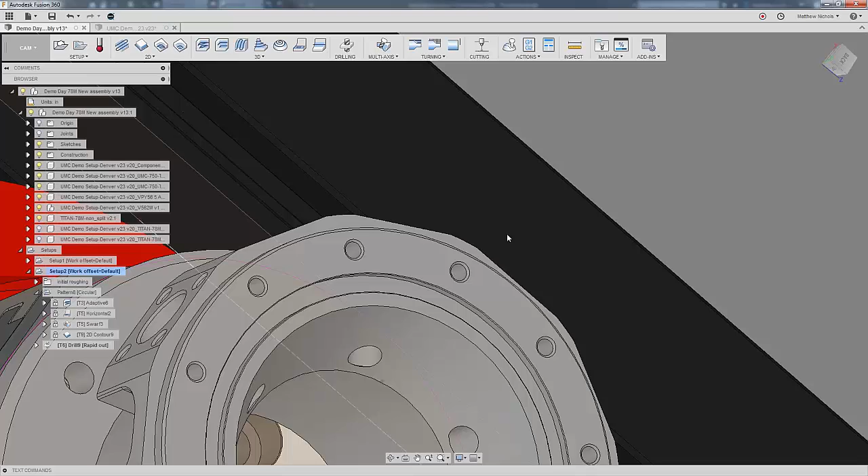Just while Matt's doing that, one other quick comment I've made a note of. Matt's doing wrapped features on a 5-axis machine. It might not be completely intuitive, but when you're using wrapped features, it does not have to be wrapping around a physical axis. Obviously, if you have a 4-axis machine, you need to wrap around the physical axis. But on a 5-axis machine, that axis you're wrapping around can be virtual, and it'll produce 5-axis motion on the machine. The toolpath is just wrapped around an axis.

Yeah, and I saw Keith mentioned about the leads on the 3D adaptive. Yeah, they were pretty crazy, so there's a modified one.

Cool, so let's see, make sure. Oh yeah, here's another one. All right, so let's say we were done with all this. I mean, obviously we're not, there's a lot more to be programmed in here. But real quick, I wanted to show, if we say we wanted to do swarf in here, or even do it on our adaptive toolpath in here.

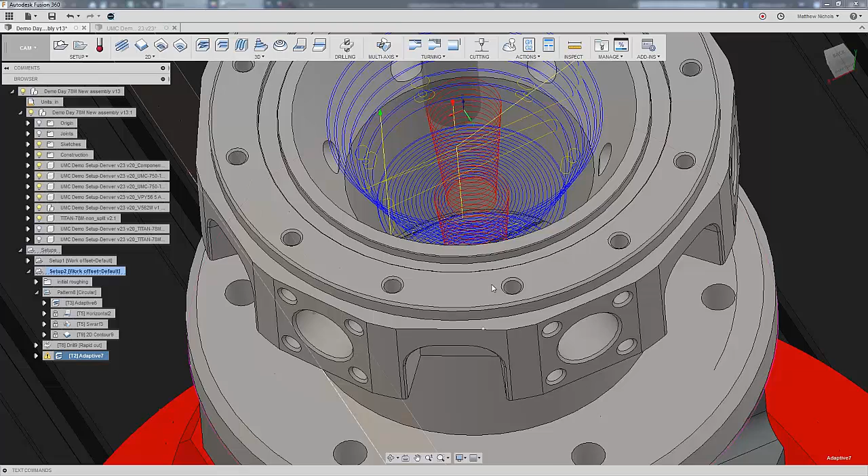So a couple different things here. You can see that I didn't pay attention to my heights, and it went clear through the part. The other thing I wanted to show here is you can see these little loops where it's actually trying to loop into where these holes were drilled.

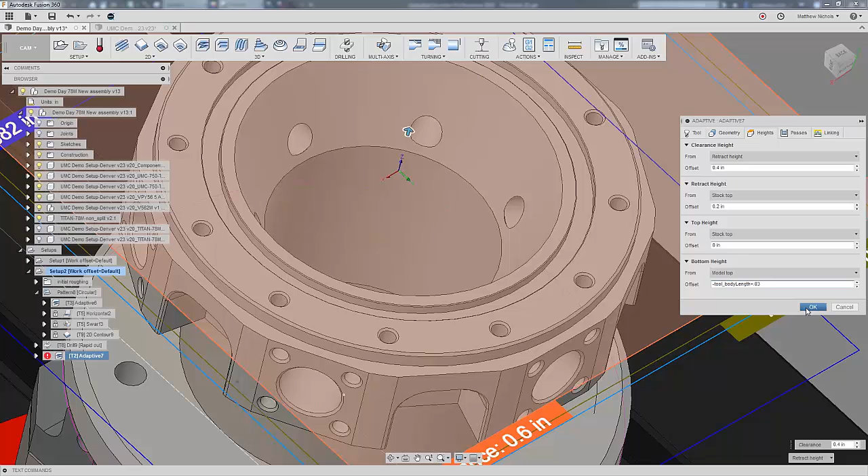Okay, so a couple things we're going to modify on here. Our heights, for one. Again, here I'm going to go model top, but then this time I'm going to actually do body length, body length plus .03.

And then the other thing I wanted to do is on one of these here, I've actually got a surface that I revolved around to kind of plug those holes. So if I go into my model right here, you can see it's got include setup model, and I want to leave that checked. But now what I want to do is I want to actually grab that surface that I created right there.

So now you can see, since I included that surface, it's not trying to dig into those holes at all. It's just giving me clean cuts all the way around.

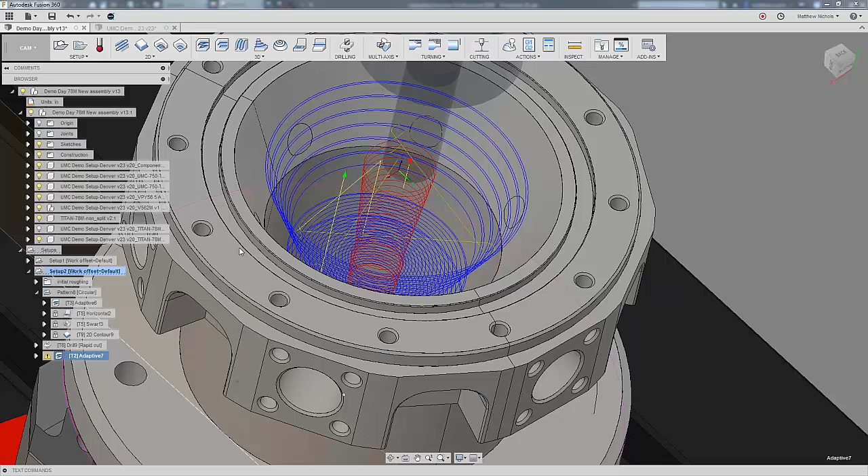Yeah, that's a very good point, Keith, that you brought up. You can, if I come in here and edit, there's this option for shaft and holder in here. Actually you don't have it on adaptive. Depending on which toolpath you're using, the 3D Pocket will have it. Usually the roughing operations don't have quite as many options, but they will still make sure you end up with a toolpath that's aware of your holder.

Right, okay, pull away works, as Keith said, pull away works quite nicely. You can't completely skip passes on a roughing operation, so that's why we don't just look at the options not there.

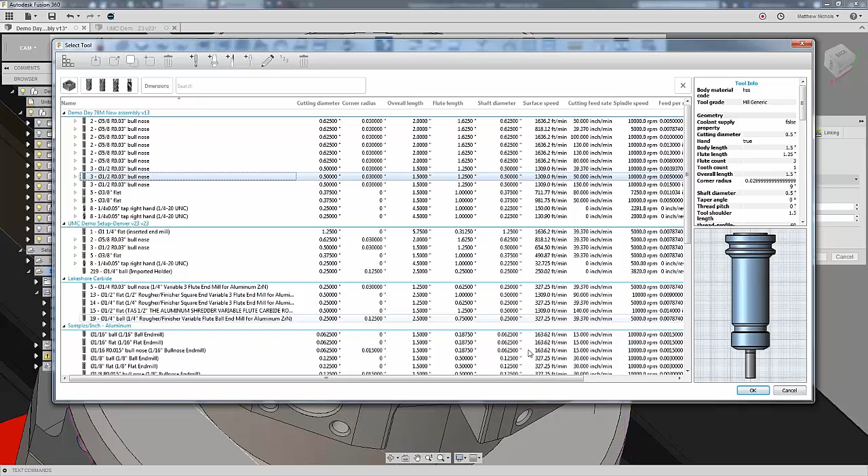Cool. And then the other thing I can do, this last thing, will be doing the swarf. So here again, since I've got this surface, I'm going to go into my geometry, and I'm going to grab it. So here it automatically sets my contours for me.

Constant slope. Now, here's one thing. If I was to go ahead and OK right here, without even paying attention to it, I'm not going to get the toolpath I want. It's going to go through the part. And that was because whenever I selected it, the arrow is on the opposite side of my lines. So if I just flip it to inside, hit OK, now it's good to go. And the reason for that is Matt was driving that off of his surface body, and a surface is not, unlike a solid, there's not a definition of what the inside and the outside of the surface is.

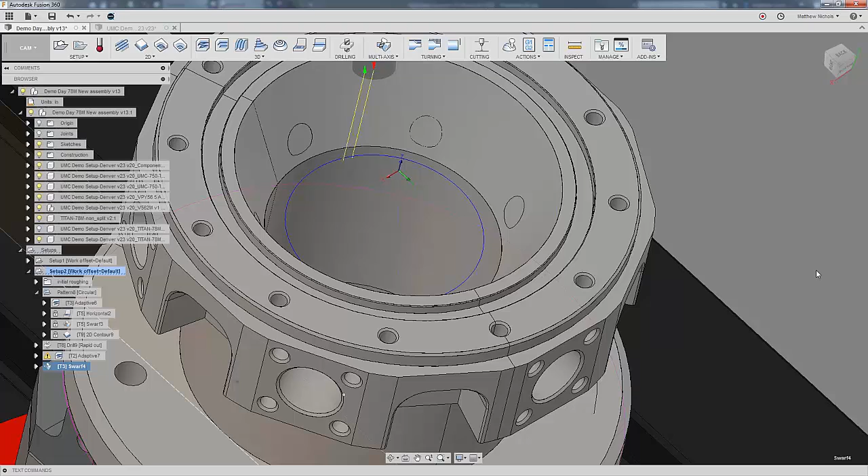Cool. That's basically all I had to cover for today. Is there any other questions or comments?

I think so, I'll just start with a quick comment, and then we can open it up for questions. I'm seeing lots of good jobs, and I learned lots in the questions. I like how you worked for Autodesk, Matt, and you were very willing and open about acknowledging some of the things in the software that it doesn't do super well today, or you have to strong arm it a little bit. We have to recognize at the end of the day, customers have to make parts. I think you did a great job this week showing what the software does well, and showing some techniques you can use to make the software do what you need it to do. So on behalf of product management, there's many things I wish the software did completely, but when it doesn't, we need to make sure our users can still make parts.

And you did a great job. The other thing for everybody, Matt clearly showed himself as somebody to reach out to anytime you want to add some math geek to what you're doing. I saw you do a lot of adding expressions inside of operations and inside of the modeling side too. So everybody should know you're a good person to reach out to on that. Yep, that's a lot of what I do.

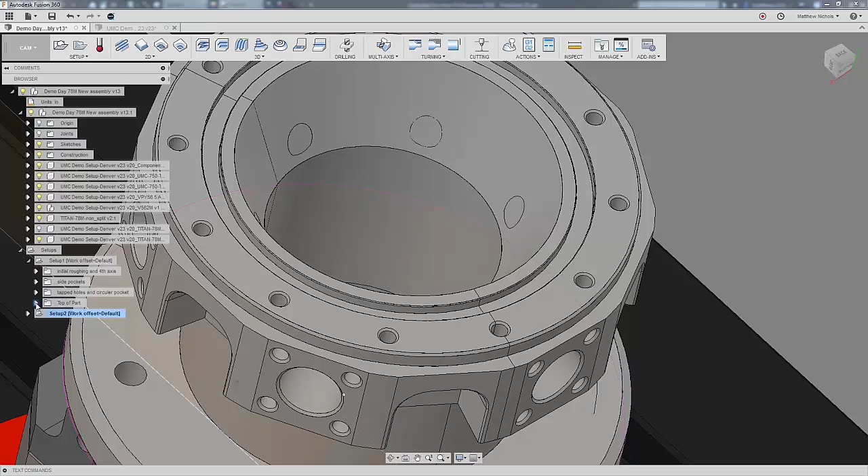Speaking of organized, I see somebody asking if we'll make this file available for all of the users, and it dawned on me - if you could just open up CAM samples for a minute, Matt, it's starting to become a little unorganized. We want to get as many files in there as we can. Maybe what might make sense is we'll add a folder for Friday Hangouts at the top there, and this could be the first data set we add. Maybe, Wayne, we can look at going back to some of the previous Hangouts and adding some of the past data sets in there, because I agree it's very nice to be able to reverse engineer what other people have done and figure out how to go about parts.

Thanks for the request - who was it? Diego was asking to get access to this part. So yeah, we'll get it into CAM samples, probably in a folder called Friday Hangouts. Keep an eye out for that.

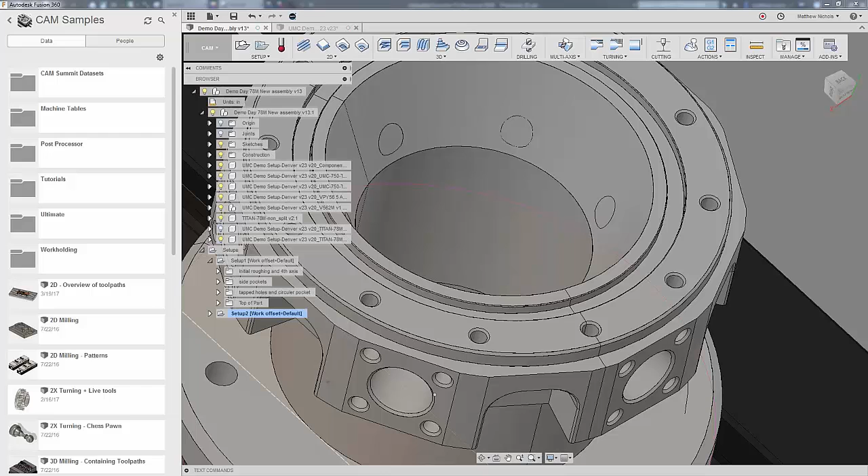Very cool, so it looks like our people are agreeing on the STL usage and being able to work with the STLs. Another quick point I'd like to add - I like when you're doing that contour on the part and you hold the Alt key to select individual lines to project and use that into your toolpath. That was another nice point, using a quick key, the Alt key, to select the geometry. Yeah, very good, I use that a lot.

Other than a lot of thanks on the question side, Matt, I don't see any other questions coming in. I saw a nice comment that some people using different 5-axis machines still learned a lot. So even though this is run on a Haas, and we obviously love working with Haas, the concepts are applicable to any 5-axis machine.

So with that, Wayne, what do we have up for a webinar next week? I was actually asking if we have Xander Luciano - he's working on a lot of 4th-axis stuff, and he does a lot of automation. When it comes inside of Fusion, he's able to work with the API a lot, and he's done some work with being able to verify and simulate. So it would be great to have a nice conversation with Xander.

I think he's also an intern now at Pier 9 - is that right, Al? His official internship at Pier 9 is going to start a little later this month. Xander will be spending the summer at Pier 9 along with one other intern, Sonny. Sonny's project is going to focus on adding to the CAM samples and fixture libraries. So feel free to reach out to us if you've got work holding files that you think should be shared with all the users, and Xander will be working aggressively on a more development-oriented project. If any of you saw his NC viewer, you know Xander's a very talented young man.